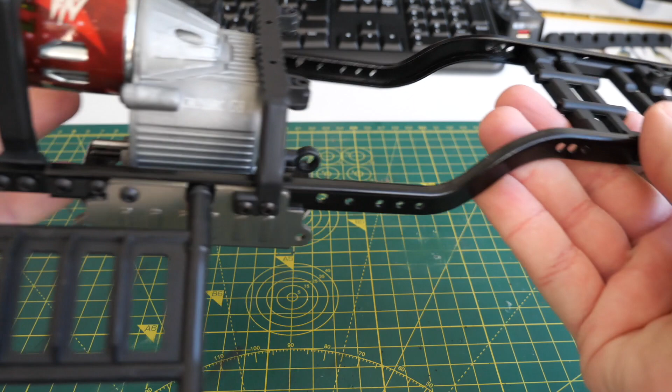Now I'll go through what I've called this fail, elephant in the room. The chassis is now the right way up.

Those that watched the original video may have noted, and I thought so as well, that it looked odd that this chassis, in the first video, the first part of the build was facing the wrong way. It's upside down. Now why did that happen? Well, I'd said in the comments that I kept looking at the manual 3 or 4 times and it looked right.

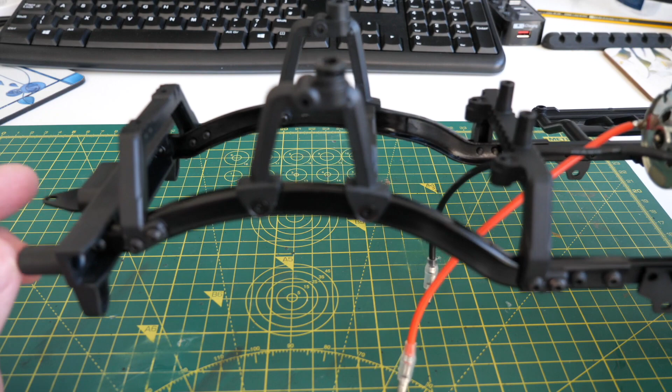I didn't mean this bit looked the right way up, but this chassis comes in 2 sections. You have the front section here, which you put the shock towers on. The rear actually hasn't got shock towers, it's leaf springs. So this is the front of the truck, and then you've got the rear here. Now it's all kept together by, as you can see in this bit here, the split is there and there, basically where my fingers are. And there is a piece of metal in between the two, which has got holes in it.

So I pulled it out of the bag. The chassis all came in one bag. Everything went together fine. But this metal part here, on the proper one, if you look in the manual, 2 of the holes are raised at the rear and lower at the front - I can't remember which way round it is. Anyway, they weren't raised on the one I had in the bag. They didn't line up all that well, but the screws and bolts went in, though they would only go in one way because these bolts are slightly higher. So I put it in the only way it would go.

And that meant that this part, the rear, was facing the wrong way. It was upside down. So I kept checking it and thinking, what? It was the only way it would go together, but of course the rear end of it was upside down. So I was getting extraordinarily confused looking at the manual, again thinking this doesn't look right. So I then didn't know what was wrong.

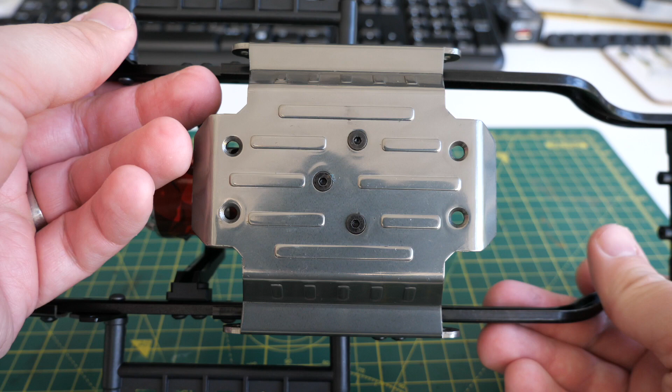Now I've had a few issues with this - I think I've got the Friday afternoon version, I'll go through what I mean. Apart from that, it's gone together fine. The screws are okay, I'm really impressed with it. Talk about some positives - the chassis is awesome. It's really long, gives you an example of just how long this truck is - I can't get it in the shot. And the beautiful bash plate underneath that secures the motor and gearbox in, that's really, really cool.

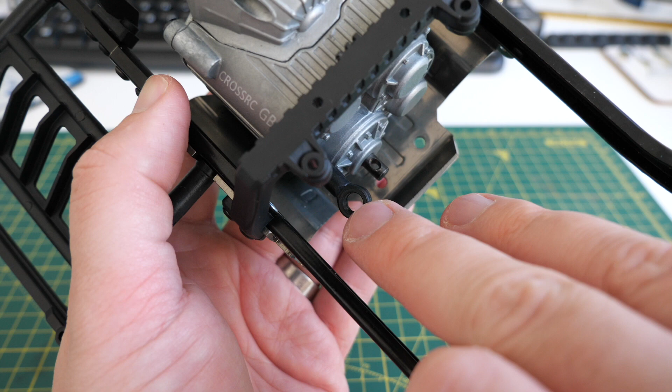So that's awesome. But I'm afraid, back to the negatives, I didn't notice - I thought something was a little bit strange about this motor and gearbox, because this gearbox is the same as I've got in the MC6 and the Mammoth. It's a 2-speed gearbox, and you'll note here the shaft sticks out here, and what you do is put the necessary attachments - the nut, the screw, the bolt, and the nut - through here, attach it to a servo, and it moves back and forwards and changes gear.

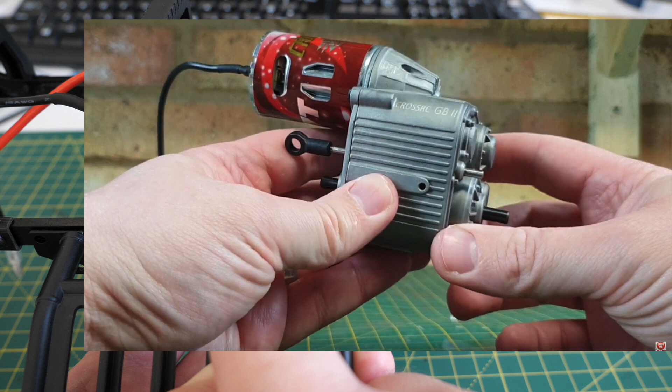Now I'll put the screenshot up of the unboxing video looking at this gearbox. This was bolted on that side, so it was the wrong way round. It wasn't until I put all the gearbox in that I thought, hang on a minute, I looked at the manual and the servo sits here. So that was obviously wrong. Someone had, when they built the gearbox, put that shaft in the wrong way round.

I'll go to the manual now so we can have a little look at what the other issue is within the gearbox, and why I think I've got the Friday afternoon jobby.

One thing I will say if you're going to build this: check all the bags. If the chassis is upside down and you screw it on and it looks wrong, check in the box, because there might be another one of these in the bag. I don't know whether they realised they put the wrong one in and already sealed the chassis up, and decided to put this in the nuts and bolts bag. I don't know what the reason is, but be careful of that if you're building this, because that's not great.

I thought the manual was wrong, but looking at it, my manual didn't seem to show the difference in the height of the bolts. But I guess if you put it on, you use the part you think, and that's how it goes on. But then the chassis is upside down, and it messes with your head.

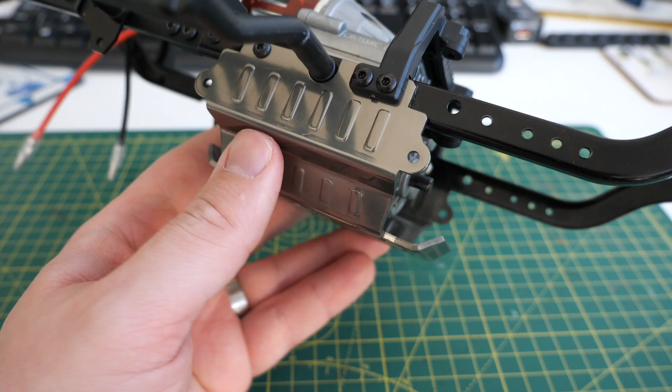Anyway, if you're going to build this, another thing to be mindful of: it says in the manual to bolt the motor and gearbox to this base plate, then put the base plate onto the chassis with these supports. To get these bolts through, you need to put nuts on the back of them, which you can see in here. That is a nightmare, trying to get your fingers in there, especially with sausage fingers like me, to get the bolts to locate the nuts and tighten up, because you've not got a lot of space.

My way around that was to unbolt the motor from the bash plate rather than attach it, because you can undo this support here and it will just slide out nicely. You then get free access without the gearbox and motor in the way to put those nuts on. It's much easier, so ignore the manual for that bit is my advice, because it takes a lot longer if the motor's in place. So don't go down that road.

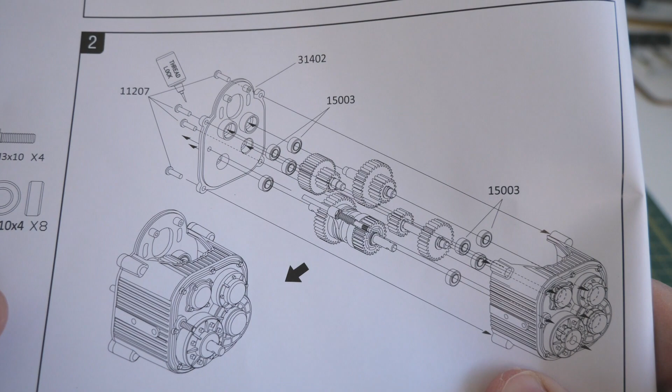So let's have a quick look at the manual. This is inside the manual of the gearbox, and this is where the gear change rod locates. You can't see it in this shot, but further on you can see this is the gear change shaft, and it has a thread on it that sticks out the back of the gearbox. Now what happened with my kit is this rod, this shaft, had been installed the wrong way round, so the thread was sticking out this way.

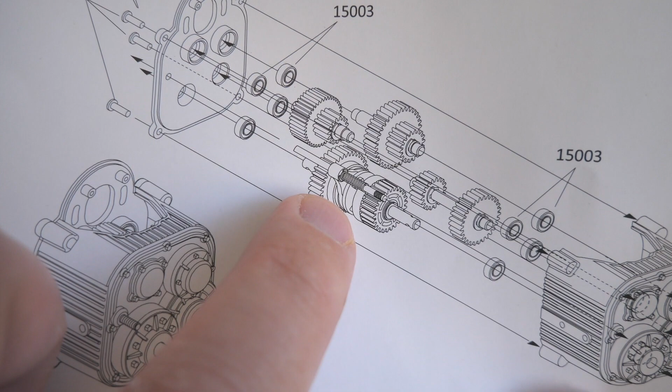So in theory you just open the gearbox, nice and easy, take this off - it's just like a claw, a U-shaped collar - it just fits in. You think, right, I take it out, unscrew this, spin it around, put it through the hole, screw it back on, job's a good one. But when I took this side of the gearbox off at the front...

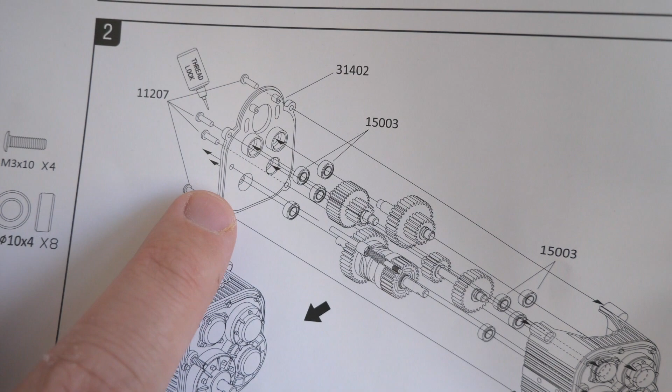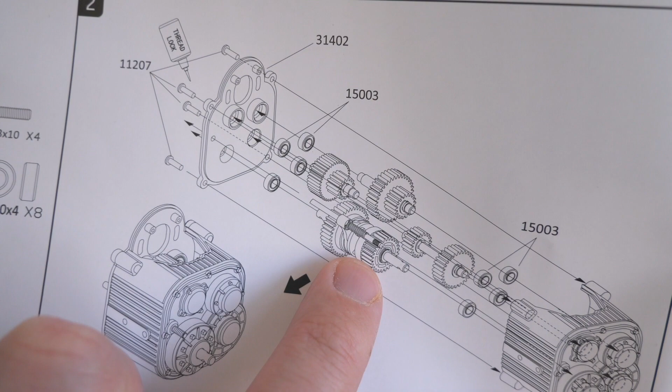All the other gears in here are machined, so everything is built onto the actual shaft and the gears themselves don't come off. But when I open the gearbox, it tends to fall out a little bit, because the shafts are only held in by the gearbox being together. All these cogs on this shaft, everything fell off, and I thought, what? I've never had that before - I've had the gearbox on the Mammoth apart and on the MC6, and never experienced that. Now the issue is this is the shaft we're talking about, and you can see it's got little C-clips there, and those C-clips have ones either side.

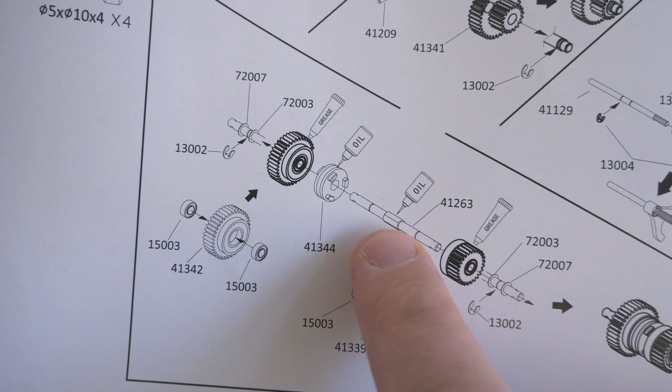They stop these gears from coming off the end of the shaft. The C-clips don't allow them to move back and forth. Well, my kit, this gearbox, hasn't got C-clips. It's not that the C-clips just aren't included, it's that this shaft hasn't got any of those indents that you see there and there. So you can't physically put C-clips on, even if you had them.

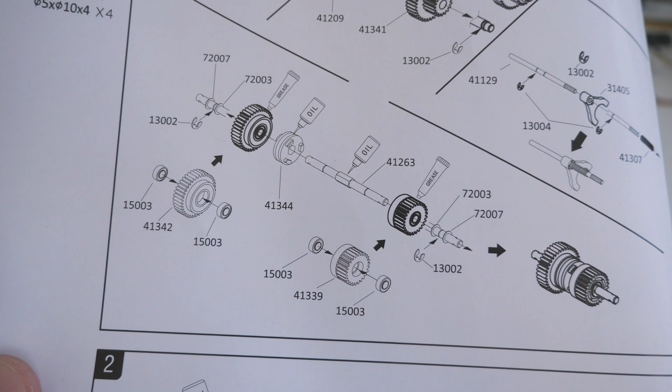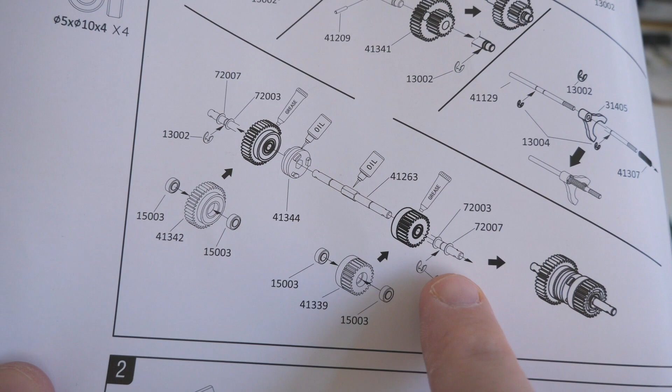And that was extraordinarily confusing. Now the only thing to stop the gears coming off or moving inside the gearbox when it's all fit together is there's kind of like brass washers, thick washers at the end of each side of the shaft, so that when you put the gearbox back on and you put the plate on, the thicker brass washers stop everything moving back and forth, and the gears coming out of place.

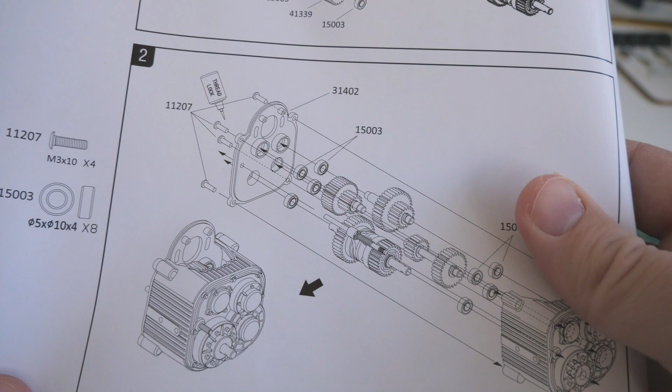So the gearbox that I've got is completely different to this manual, and that was extraordinarily puzzling. Getting that together is a real mission, because normally all this doesn't fall apart once it's in. But of course, without any C-clips in it, all there is just washers either end, and they can move. It is a bit fiddly to get this gearbox together anyway, but it's made it 10 times harder.

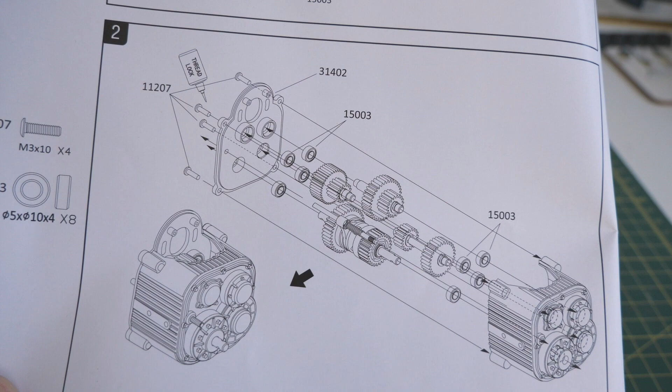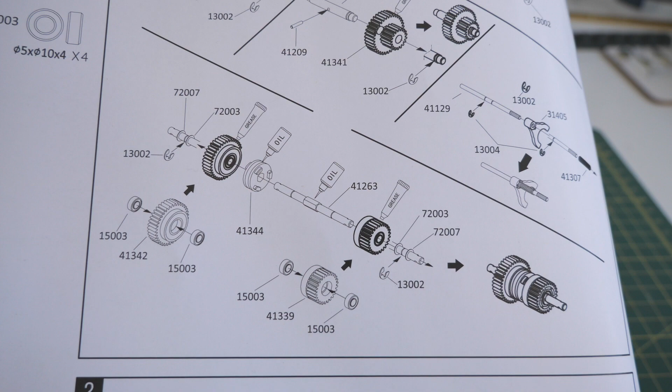So I put the gearbox back together. I hadn't run it up at that point, so I was then concerned. I attached it to the ESC and my radio gear and spun it up, and then I pulled the gear change shaft back and forward, and it seems to engage. It seems to work fine.

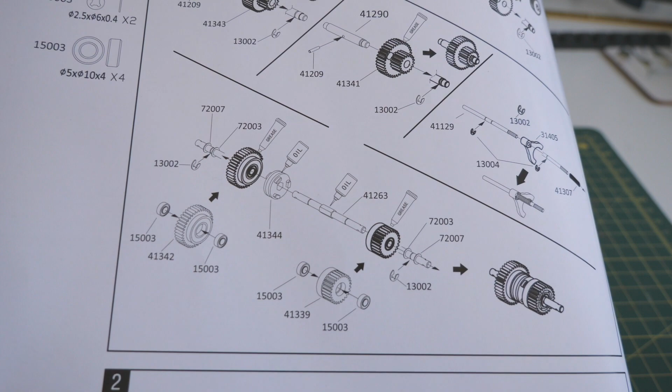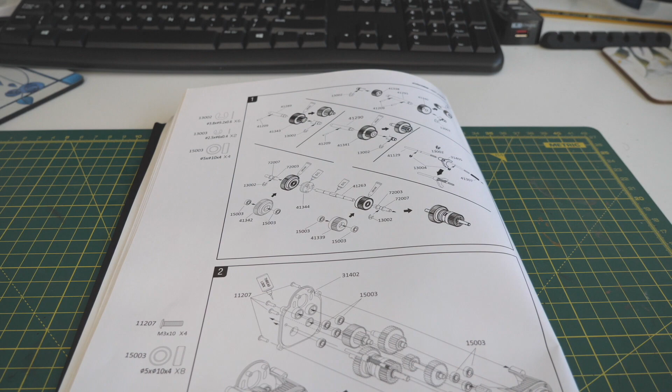So I think it must be an older gearbox. What I've done is I've spoken to Simon at Green's Models, and he had a PG4A, and he had the same thing. When he opened the gearbox, he was puzzled and hadn't seen it before. It obviously must be an older gearbox for them, and they've put that page in the manual from somewhere - I don't know what's happened.

Needless to say, I am proceeding from now on with extreme caution. I have also encountered - you can see just at the bottom of the shot here - these are supposed to be scale, these bolts here. You get a corresponding bag, and you open the bag and you pick which bolt, and it's normally great.

You put the bolt next to the scale drawing, you think, yeah, I've got the right one. I've had a couple of instances where the bolt it's given me doesn't match up with this, and I've measured the bolt with my measuring tool. Luckily I've got one, and the bolt's the right size - it's just this printing on the picture is wrong. So now I'm checking every single bolt. I'm not going by this. I'm measuring everything just to make sure.

So it's not been the best of starts, sadly. I've had issues, but I don't know, I think I've got the Friday afternoon rig, especially the fact that this was the wrong way around.

So with this section here, there being 2 sets of them, to be fair, it's partly my fault. I haven't gone through the whole manual to see - I'm assuming the other ones I've got go somewhere else, and they've just put the wrong one in the wrong bag. I should have checked, my fault. When it went together but it didn't look right, I should have gone back and had a look if there was any others in there, but I used the one that was in the bag.